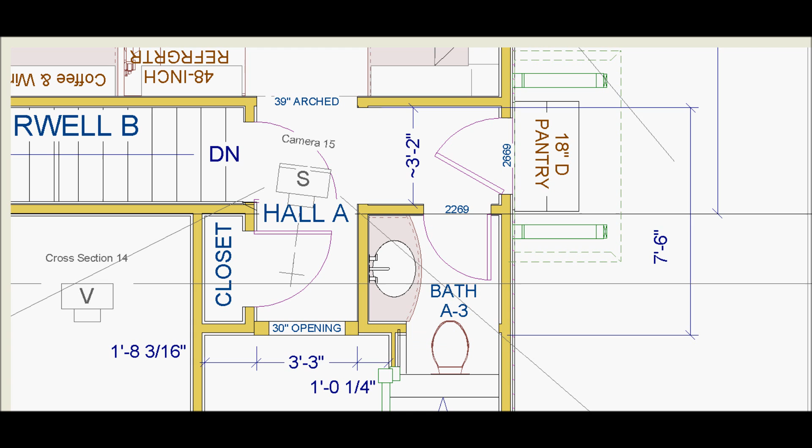So this is the first situation with as wide a door as I could put in and still maintain casings in the hallway, and that leaves you with a 30-inch opening. The hallway itself is 39, but the net space through here is 30, like what is existing at your transition from the front hall to the rear right now. And this is, I'm showing you, the doorways on either end. You wouldn't have to have them on both ends, but either way, at some point that comes down to 30 inches. I'm showing the outlines of the casings here.

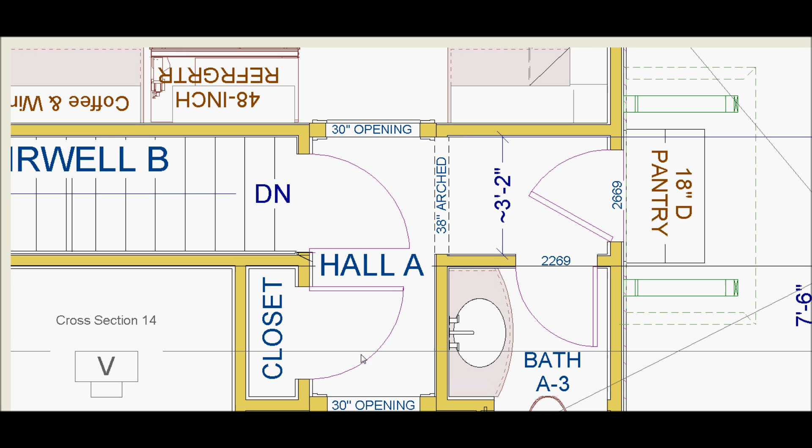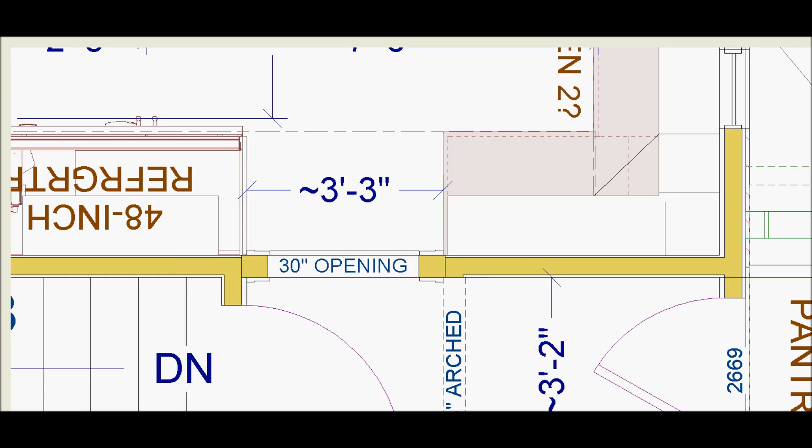Going forward, then, this is just a close-up view of why that happens, because of the casings on either side. You have a 30-inch opening. Presumably this is a pocket door that slides back that way, or it's double doors that open in this way. I've just started the kitchen, using up all the space, bringing the cabinets right up to that casing you see here, and it leaves you 3'3" inside.

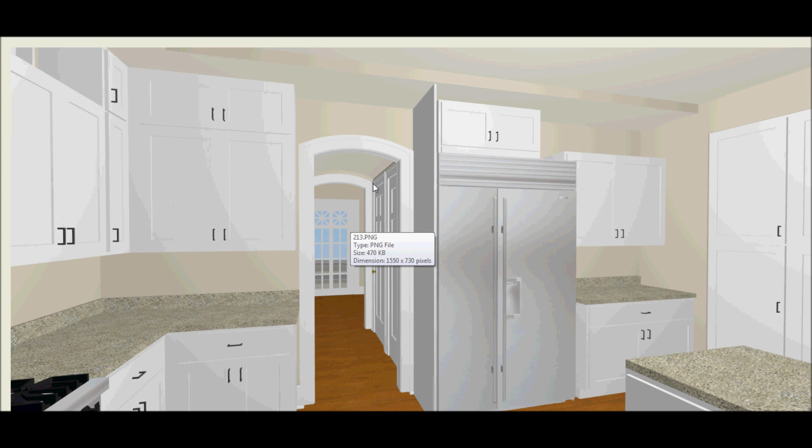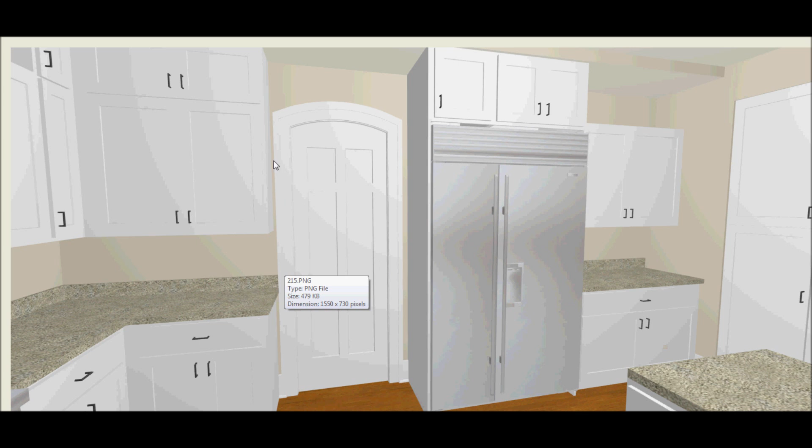Next, if you wanted the arch, this is it. It's fairly high because I want to align this casing with that, and this can be a pocket door also, but again, it's the same situation, 30 inches wide, because I'm maintaining casings inside the hallway. Probably shift that over a little bit, give you some margin there. I think that looks better, obviously. And here it is, again, 30-inch door. This is with an arch top. I don't think that's really necessary at all in the scheme of things. Maybe you have glass in that, or some sort of mottled glass, or obscure type glass. I would think fluted would be better, but this is what I had available.

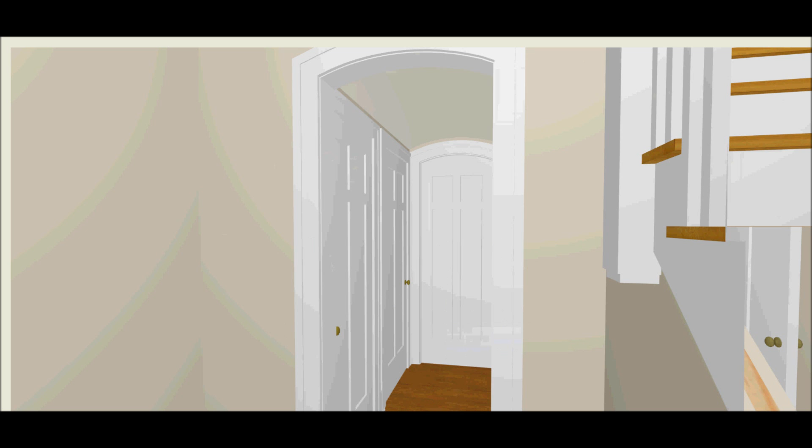And then this is from this end. Again, though, these are these 30-inch openings through here. I don't want to make that a big deal. It's just something to consider. No glass on that end. Now, a second way to do this: leave this end of the hall alone, and then put doors on this end that maintain full width casings on each side. You still have a point at which it's cut to 30 inches. But for one thing, if we put a pocket door here, we're going to have to thicken this wall, and we're going to lose some space in the kitchen, etc., which could be critical.

So this one's showing, I push little double doors down to this end of the hall, and these are the doors that maintain casings in here, so you still end up with a 30-inch opening through here. And as soon as you get through that, then it becomes the wide 39-inch hall all the way through. Perhaps it's better to have the doors down at this end. This way, when they're closed, you still have access to the first floor bath and the rear door and all of that sort. And plus, it just doesn't feel so closed in the kitchen when you're in there. Perhaps that's something you want, though. Again, these are things to think about.

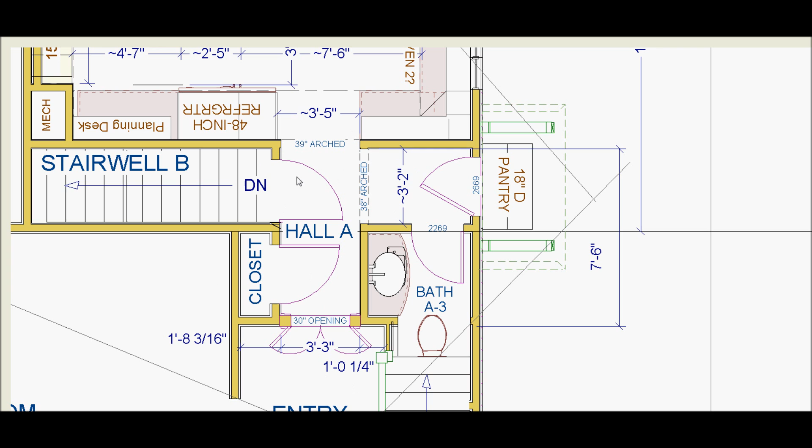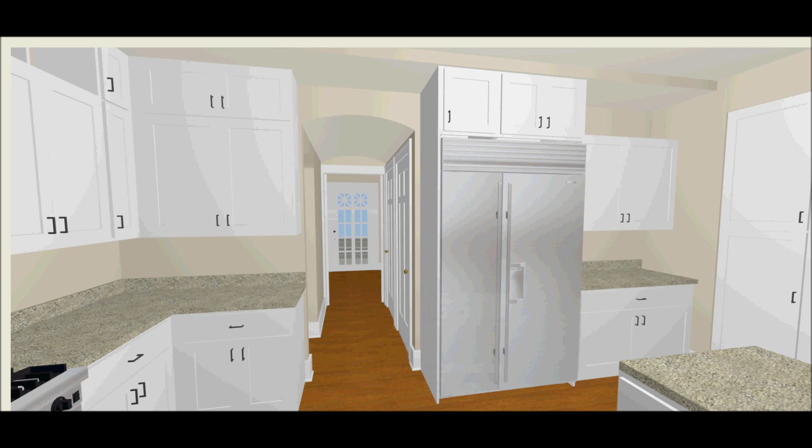Next, we could put a wider door so that you get a 36-inch opening, and then you have full casings on the entry side, but in here the casings become truncated or chopped or whatever you want to call them. It's not bad. It's like this then, where you have a full width casing at the top, but the sides are trimmed, and this is not an uncommon thing. It's just not perfect is all. Perhaps that might be preferable. And there with the doors closed.

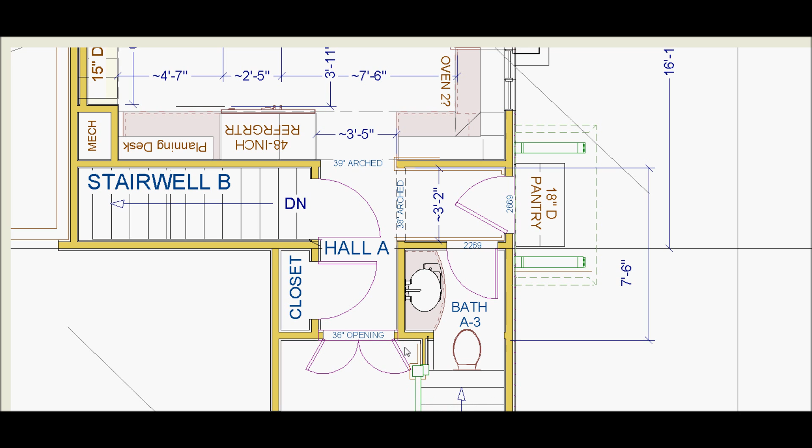And from this side, these are the larger doors. That maintains a 36-inch opening here. You can see they come out in front of this piece here. Flip back twice. See where they come out here when they're open. And obviously, this widens that existing doorway, so there's issues. We'll have to put that vent, that register, somewhere else. That's them. That was them, and that's them closed.

Okay, that's the end of part 2 of 3.